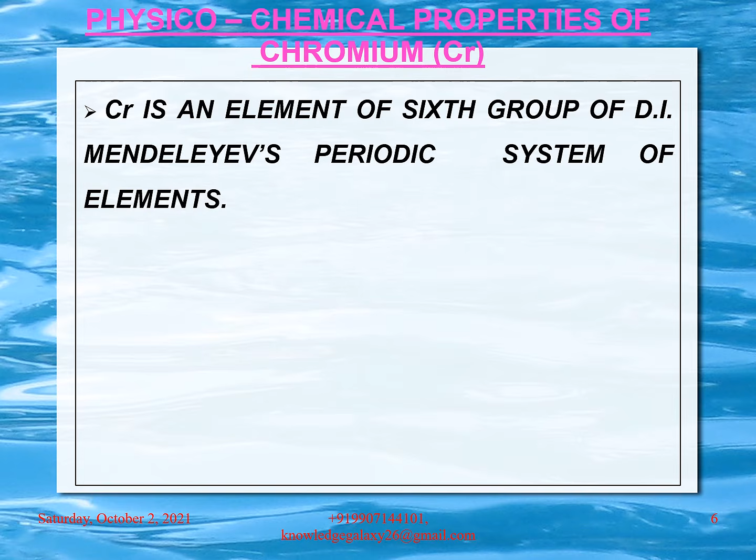First, we will start with the physico-chemical properties of chromium, that is chrome, Cr. Chromium is an element of the sixth group of D.I. Mendeleev's periodic system of elements. Mean chromium content in the Earth's crust comes to around 0.02%. As an element, chromium was discovered in 1797 simultaneously by Vauquelin and Klaproth.

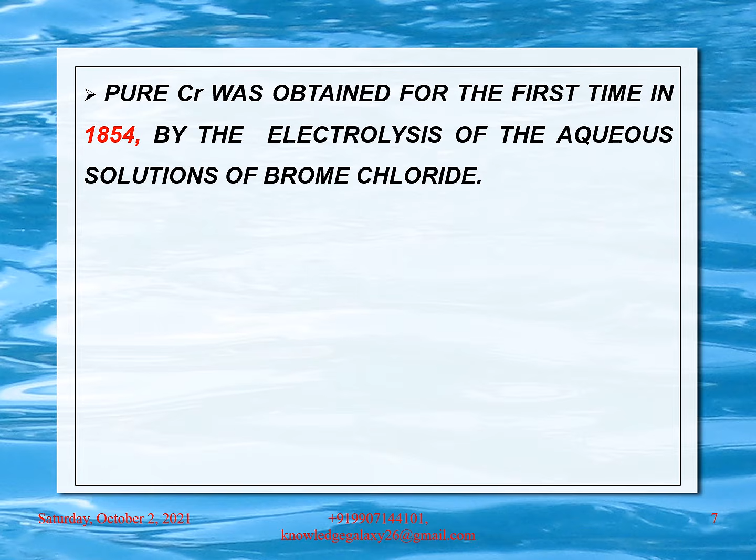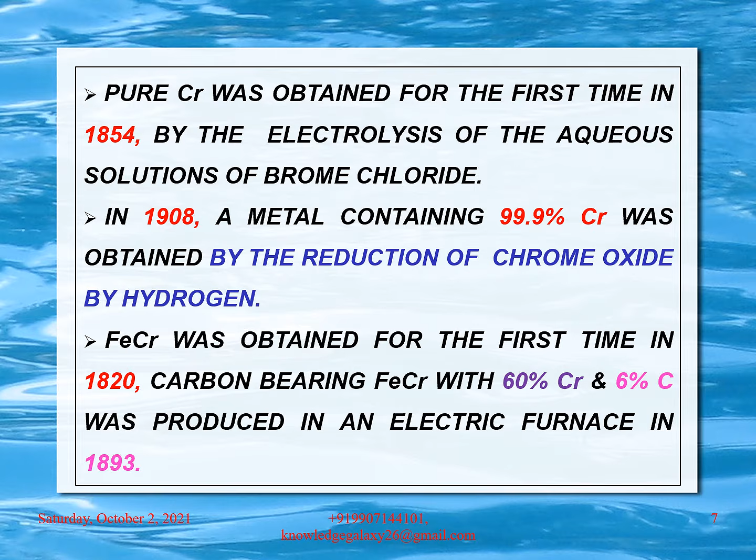Pure chromium was obtained for the first time in 1854 by the electrolysis of aqueous solutions of chrome chloride. In 1908, a metal containing 99.9% chromium was obtained by the reduction of chrome oxide by hydrogen. Ferrochrome was obtained for the first time in 1820. Carbon-bearing ferrochrome with 60% chromium and 6% carbon was produced in an electric furnace in 1893. Low-carbon ferrochrome and metallic chromium were initially obtained by the aluminothermic method.

Pure chromium is a grey lustrous metal. Chromium possesses the following physicochemical properties. First, its atomic weight is 52.01. Specific gravity at 20 degrees Celsius is 7.19 grams per cubic centimeter. Valency of chromium is 2, 3 and 6. Melting point is 1930 degrees Celsius. Its boiling point is 2470 degrees Celsius. Specific heat capacity at 25 degrees Celsius is 0.12 calories per degree Celsius.

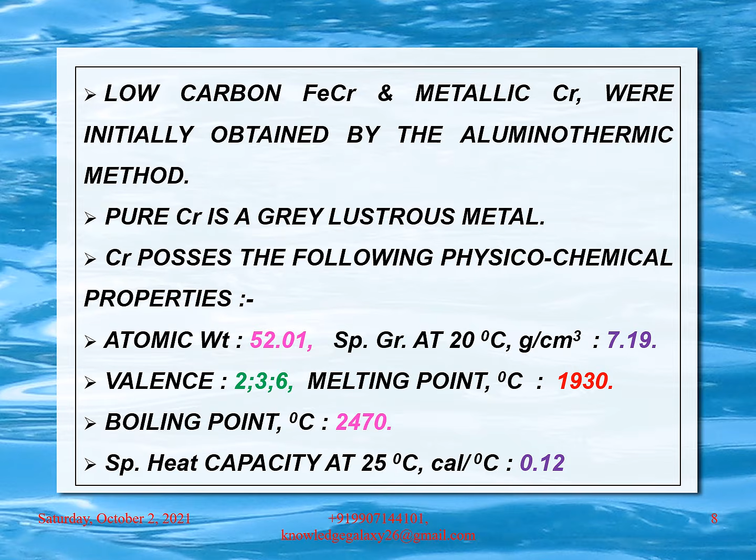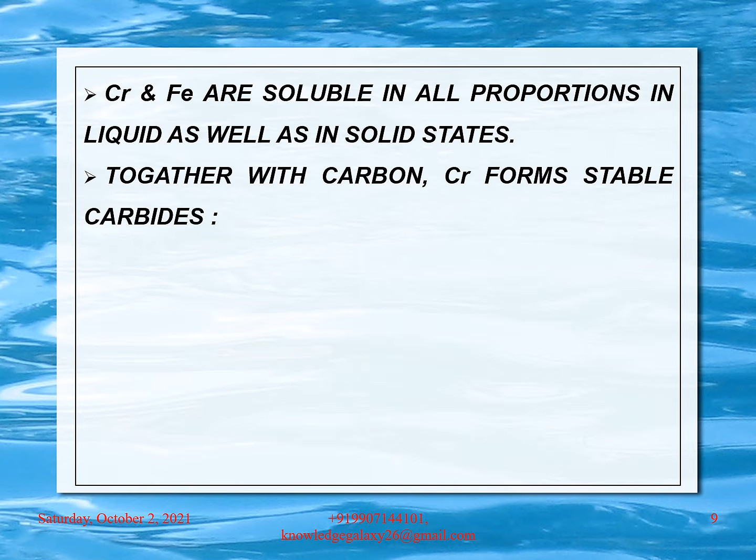Chromium and iron are soluble in all proportions in liquid as well as in solid states. Together with carbon, chromium forms stable carbides such as Cr4C with a melting point of 1520 degrees Celsius and 5.46% carbon. Second, Cr7C3 with a melting point of 1780 degrees Celsius and 9.01% carbon. And third, Cr3C2 with a melting point of 1895 degrees Celsius and 13.34% carbon. My dear friends, as is evident from this, with increase of carbon content, the melting point of chromium carbides increases.

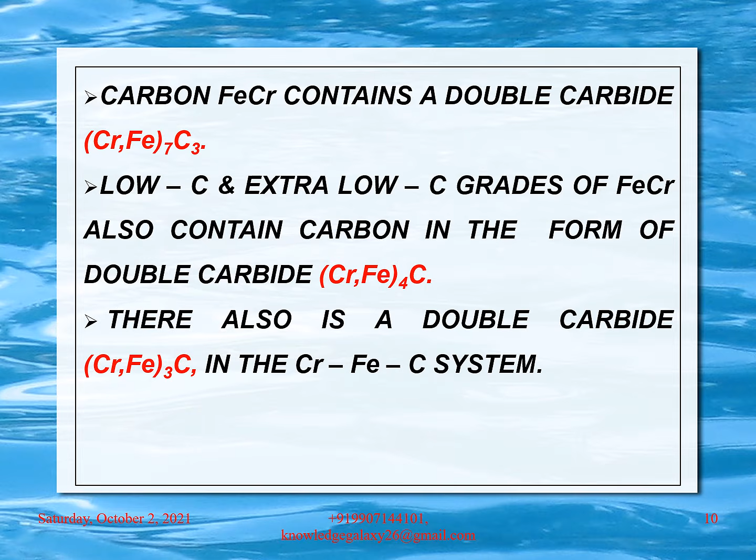Carbon ferrochrome contains a double carbide (Cr,Fe)7C3. Low carbon and extra low carbon grades of ferrochrome also contain carbon in the form of double carbide CrFe4C. There also is a double carbide CrFe3C in the chromium iron carbon system.

With silicon, chromium forms silicides of chromium: Cr3Si with a melting point of 1710 degrees Celsius, Cr3Si2 and CrSi2 with a melting point of 1550 degrees Celsius, and the most stable silicide CrSi with a melting point of 1545 degrees Celsius.

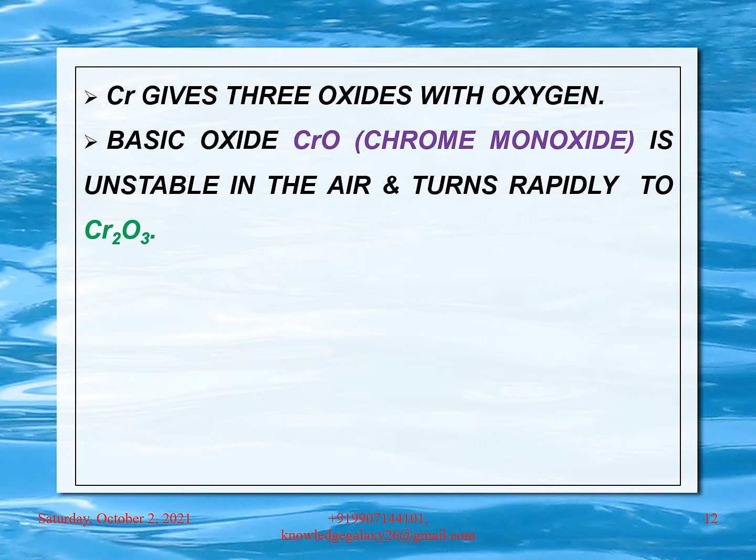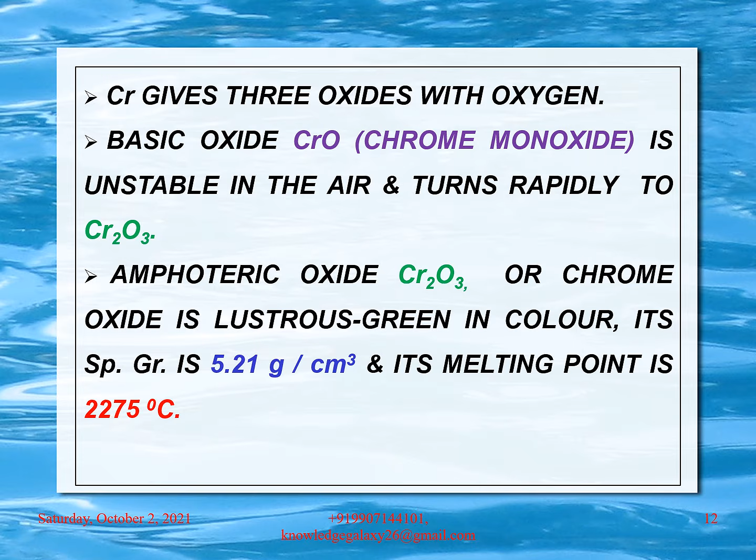Chromium gives 3 oxides with oxygen. Basic oxide CrO, that is chrome monoxide, is unstable in the air and turns rapidly to Cr2O3. Amphoteric oxide Cr2O3 or chrome oxide is lustrous green in color. Its specific gravity is 5.21 gram per cubic centimeter and its melting point is 2275 degrees Celsius.

Acid oxide CrO3, that is chromic anhydride, is crimson in color, has a specific gravity of 2.7 gram per cubic centimeter and a melting point of 196 degrees Celsius. Chromic anhydride decomposes entirely at 240 degrees Celsius with the formation of chrome oxide Cr2O3.

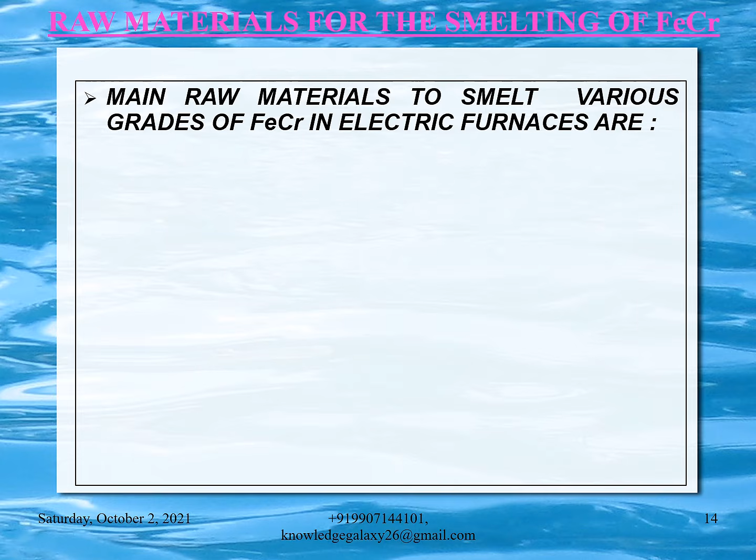Now let us discuss the raw materials required for the smelting of ferrochrome. Main raw materials to smelt various grades of ferrochrome in electric furnaces are: first, chrome ores, that is concentrates, briquettes, lumps and chips. Second, reducers: met coke, fine coke and ferrochrome silicon. Fluxes: quartzite and lime.

Chrome ores whose main chromium bearing components are the chromium spinels (Mg,Fe)(Cr,Al,Fe)2O4 containing from 48 to 62% of Cr2O3, the rest being gangue formed by Al2O3, FeO, MgO etc., are used industrially.

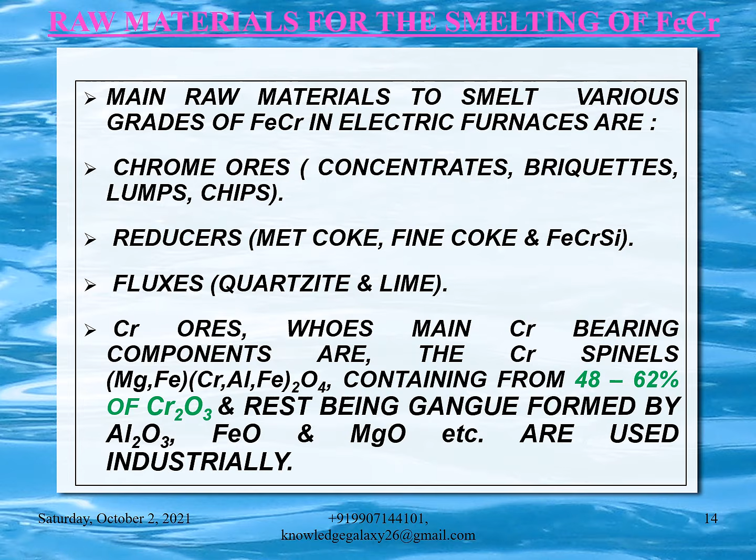The presence of gangue affects the composition of chrome ores. It changes the chromium oxide content in the mineral as well as the Cr2O3 to FeO ratio, which is the main factor of chrome ore quality. I repeat, the Cr2O3 to FeO ratio is the main factor of chrome ore quality. Do remember this. Since FeO is always more readily reduced than Cr2O3, iron is wholly reverted to the alloy when chrome is reduced.

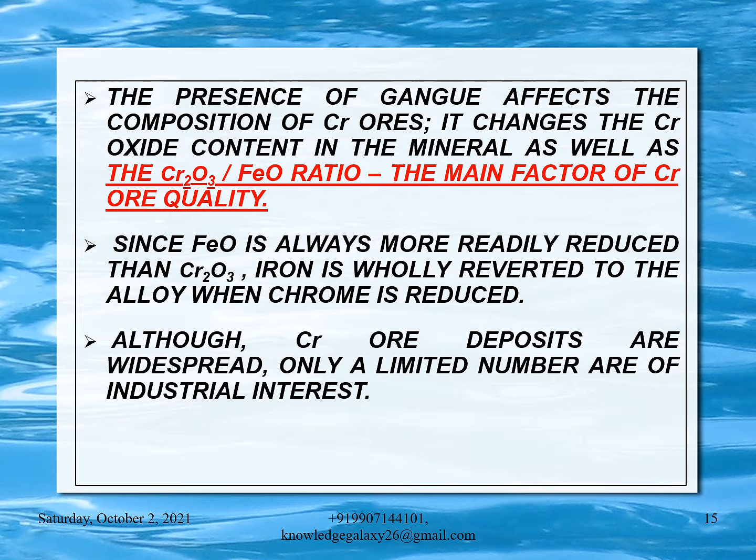Although chromium ore deposits are widespread, only a limited number are of industrial interest. Ores used for the production of refined ferrochrome by the silicothermic method should have the minimum possible SiO2 content, for otherwise additional quantities of fluxes have to be provided, and that entails additional losses of chromium and electrical energy.

The FeO content should be at the minimum too, since a high FeO content leads to unwarranted consumption of the high cost reducer ferrochrome silicon and damages the furnace lining. According to ferrous metallurgy, chromium ore specifications intended for the manufacture of ferroalloys must meet the requirements listed in table 1 below.

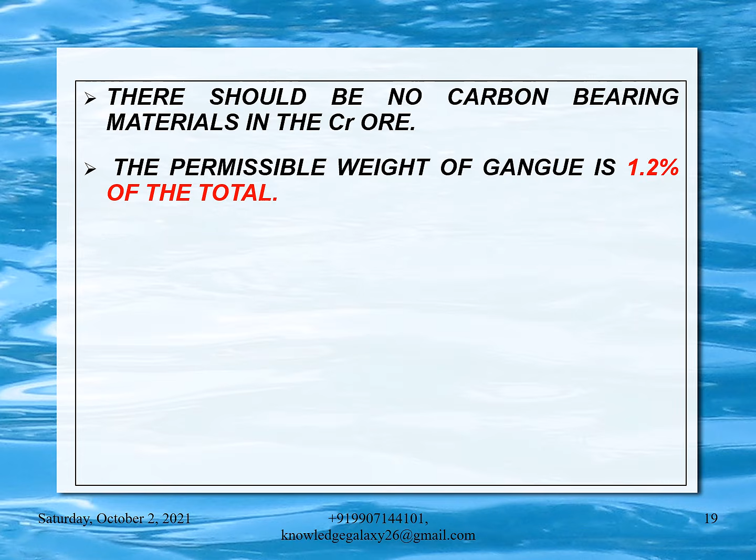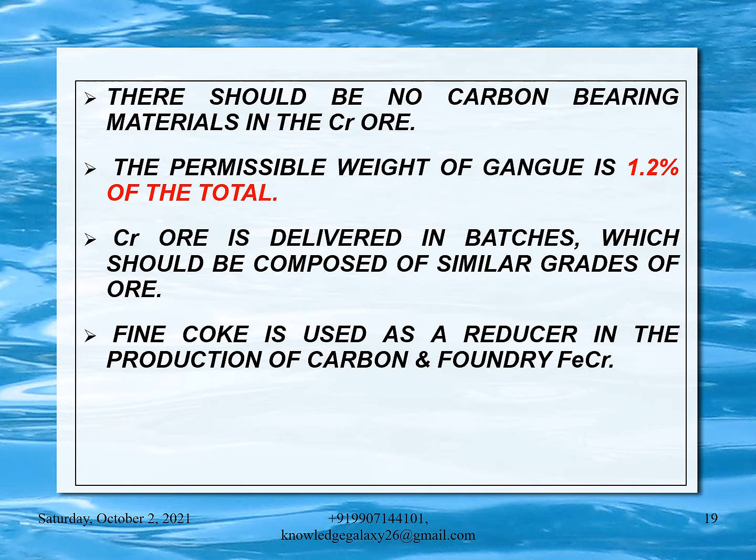Fine coke is used as a reducer in the production of carbon and foundry ferrochrome. I repeat it once again: fine coke is used as a reducer in the production of carbon and foundry ferrochrome. Ferrochrome silicon is used as a reducer when smelting other grades of ferrochrome. There is a difference in reducers used for different grades of ferrochrome, so please do remember.

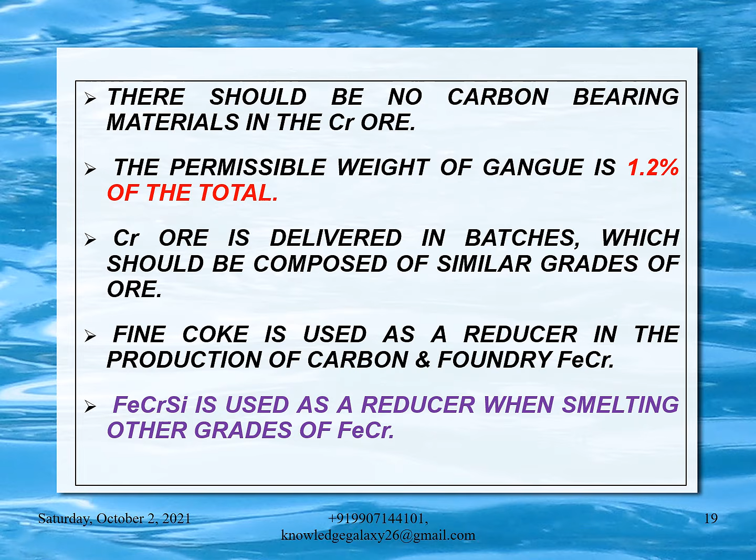The fluxing material used in the manufacture of refined ferrochrome is lime. It should be well burnt and contain at least 90% CaO and below 0.025% phosphorus. The lumps of lime should not exceed 80 mm in size. Hydrated lime is not to be used. Quartzites are used as fluxing material when smelting carbon grades of ferrochrome.

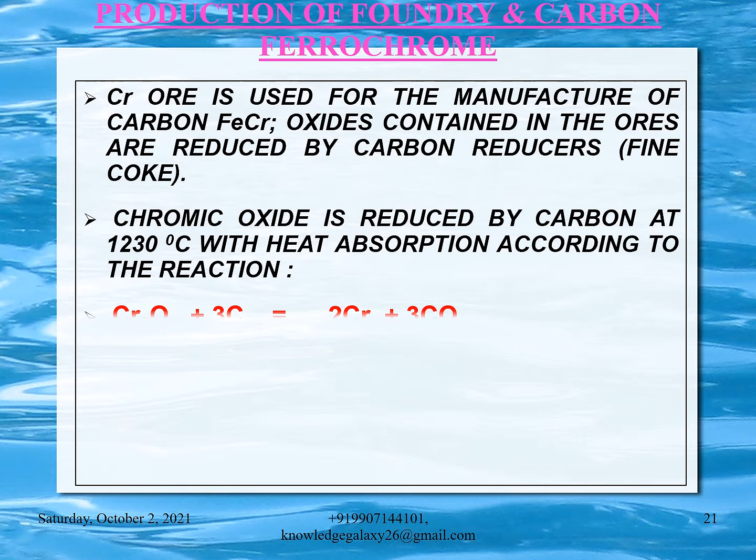Now let us discuss the production of foundry and carbon grades of ferrochrome. Chromium ore is used for the manufacture of carbon ferrochrome. Oxides contained in the ores are reduced by carbon reducers, that is fine coke. Chromic oxide is reduced by carbon at 1230 degrees Celsius with heat absorption according to the reaction Cr2O3 + 3C = 2Cr + 3CO.

Stable carbides are formed in the reduction of Cr2O3 by carbon at 1100 degrees Celsius according to the reaction Cr2O3 + 27/7 C = 2/7 Cr7C3 + 3CO. The reduction of FeO proceeds according to the reaction FeO + C = Fe + CO. Iron reduced from ore promotes the reduction of chromium, since chrome carbides which appear in the later processes dissolve in iron with the formation of double carbides (Cr,Fe)7C3.

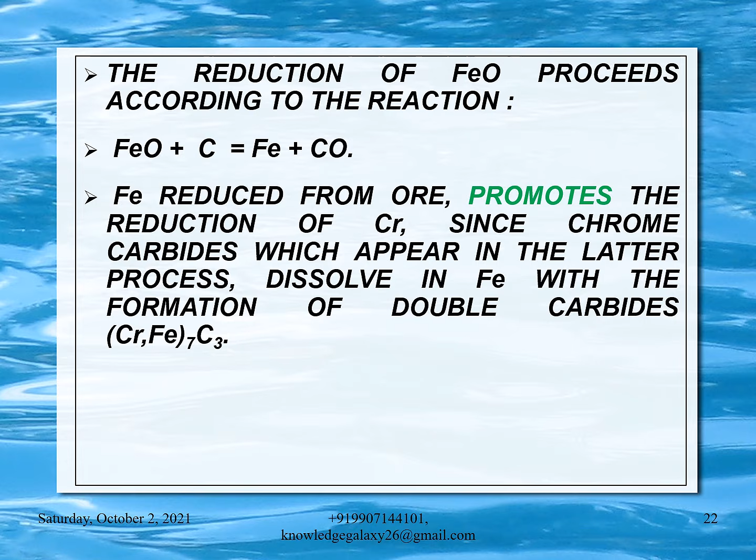The melting point of commercial carbon ferrochrome is about 1500 degrees Celsius. Although the temperature of the reduction processes of chromium and iron oxides are relatively low, the smelting of carbon ferrochrome is practically effected at 1650 to 1750 degrees Celsius because this ensures sufficient slag and alloy fluidity and satisfactory slag-alloy separation.

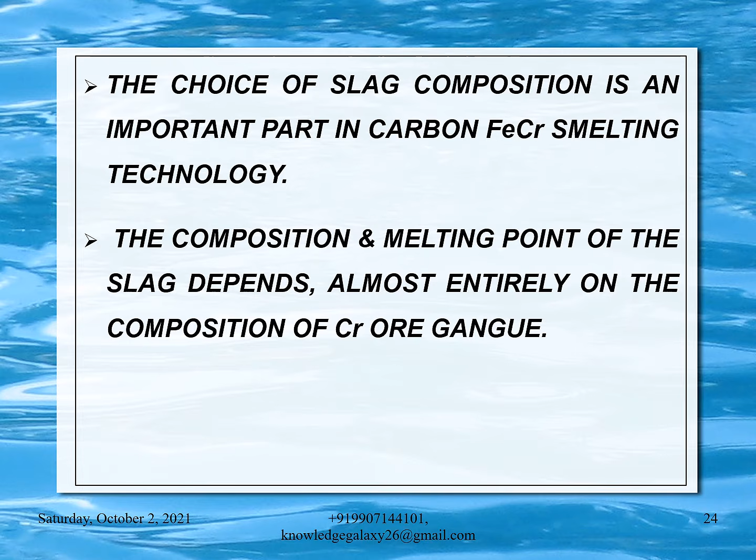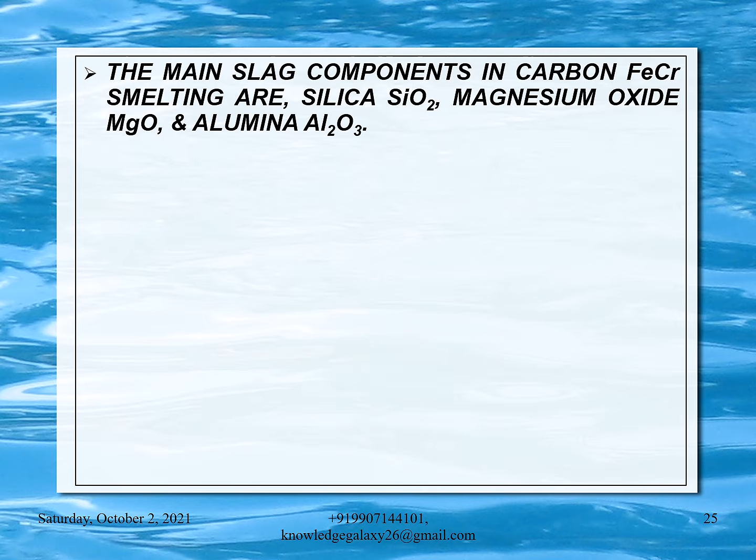The choice of slag composition is an important part in carbon ferrochrome smelting technology. The composition and melting point of the slag depends almost entirely on the composition of chrome ore gangue. The main slag components in carbon ferrochrome smelting are silica SiO2, magnesium oxide MgO and alumina Al2O3.

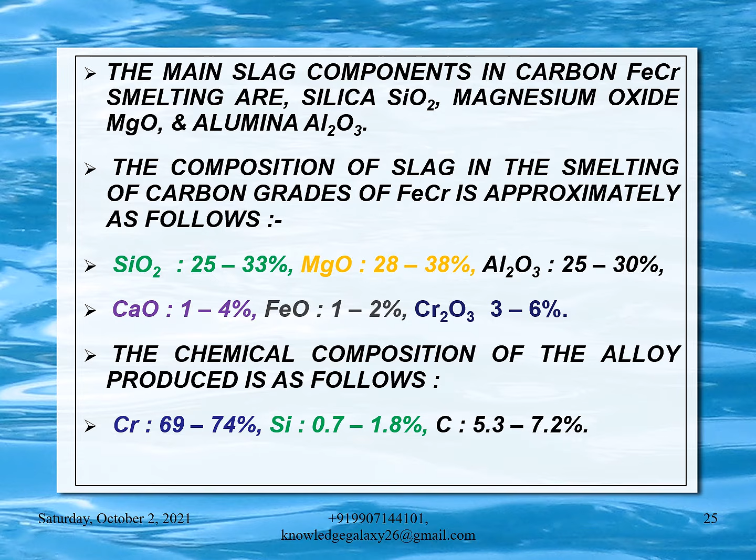The composition of slag in the smelting of carbon grades of ferrochrome is approximately as follows: SiO2 25 to 33%, MgO 28 to 38%, Al2O3 25 to 30%, CaO 1 to 4%, FeO 1 to 2%, Cr2O3 3 to 6%. The chemical composition of the alloy produced is as follows: chromium 69 to 74%, silicon 0.7 to 1.8%, carbon 5.3 to 7.2%.

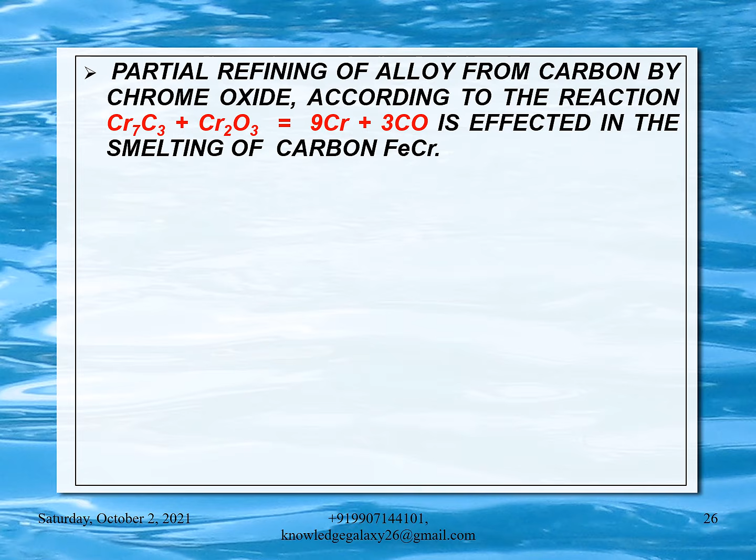Partial refining of alloy from carbon by chrome oxide according to the reaction Cr7C3 + Cr2O3 = 9Cr + 3CO is effected in the smelting of carbon ferrochrome. This process is possible only at high temperatures and with elevated concentrations of chrome oxide in the reaction zone. Consequently, the smelting process is effected in the presence of hard-to-fuse slags which are formed when hard-to-reduce lumps of rich ores are used.

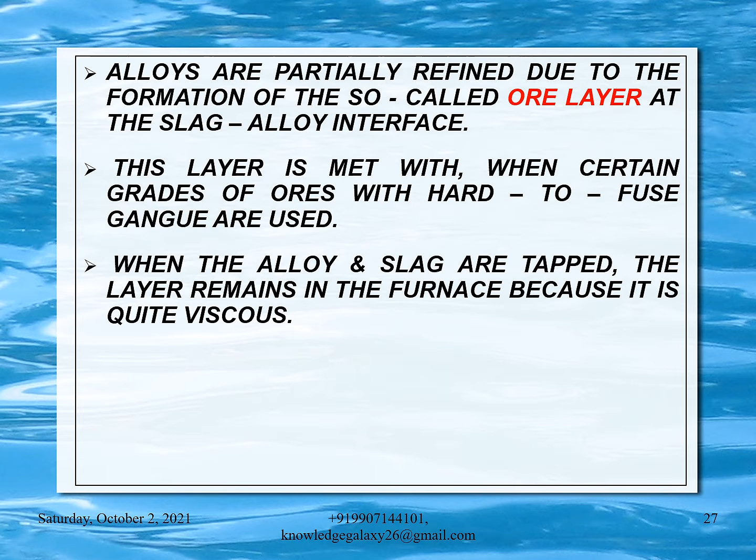Alloys are partially refined due to the formation of the so-called ore layer at the slag-alloy interface. This layer is met with when certain grades of ores with hard-to-fuse gangue are used. When the alloy and slag are tapped, the layer remains in the furnace because it is quite viscous. Drops of alloy trickle down through the layer and are partly refined from carbon.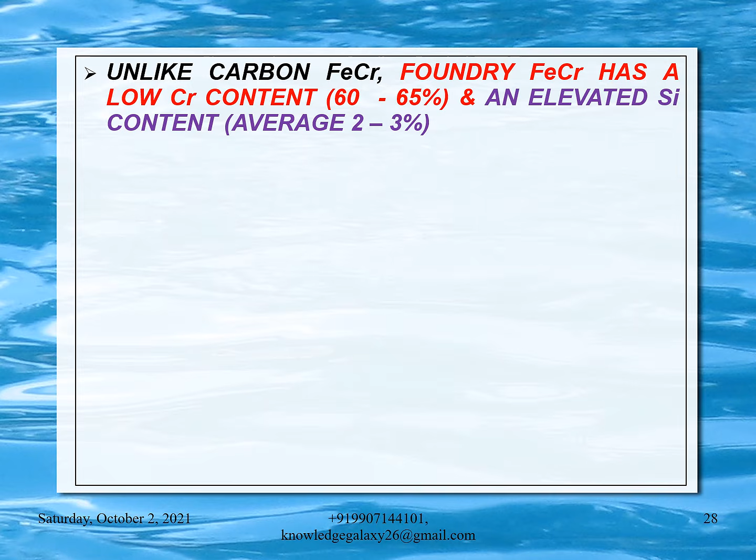Unlike carbon ferrochrome, foundry ferrochrome has a low chromium content, that is 60 to 65%, and an elevated silicon content, which is on average 2 to 3%. Its carbon content is not specified, and this may cause an excess of silica and reducer in the mixture. Such an alloy assay permits the use of low quality ores, chromium-bearing slags with 25 to 30% Cr2O3, and tailings of ferrochrome and ferrosilicon smelting. The high temperatures of the process ensure the reduction of silicon in addition to that of chromium and iron.

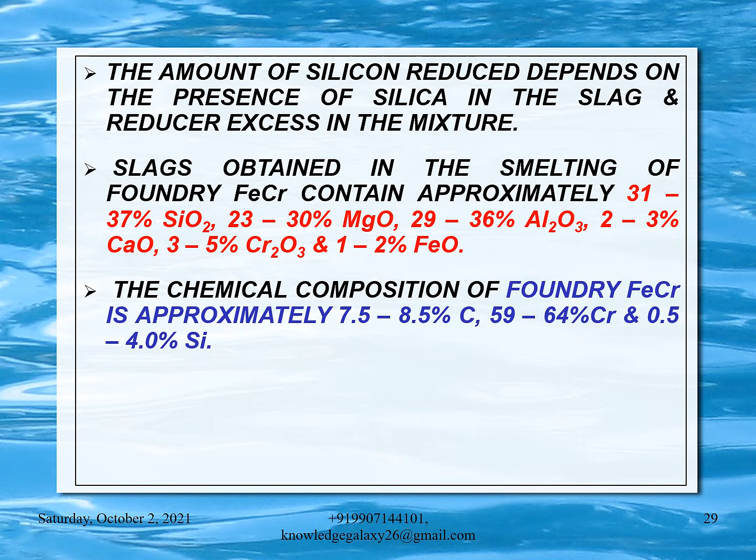The amount of silicon reduced depends on the presence of silica in the slag and reducer excess in the mixture. Slags obtained in the smelting of foundry ferrochrome contain approximately 31 to 37% SiO2, 23 to 30% MgO, 29 to 36% Al2O3, 2 to 3% CaO, 3 to 5% Cr2O3, and 1 to 2% FeO. The chemical composition of foundry ferrochrome is approximately 7.5 to 8.5% carbon, 59 to 64% chromium, and 0.5 to 4% silicon. Quartzites are added to the mixture to provide the necessary amount of silica in smelting both carbon and foundry ferrochrome.

So, my dear friends, let us now discuss the uses of ferrochrome. Ferrochrome is an alloy of chrome and iron with additions of carbon, silicon, and several other elements. As an alloying element, chrome is a component of numerous grades of steels and special alloys. Steels alloyed with chrome acquire valuable physical properties. It increases steel hardness, strength, yield point, and elasticity.

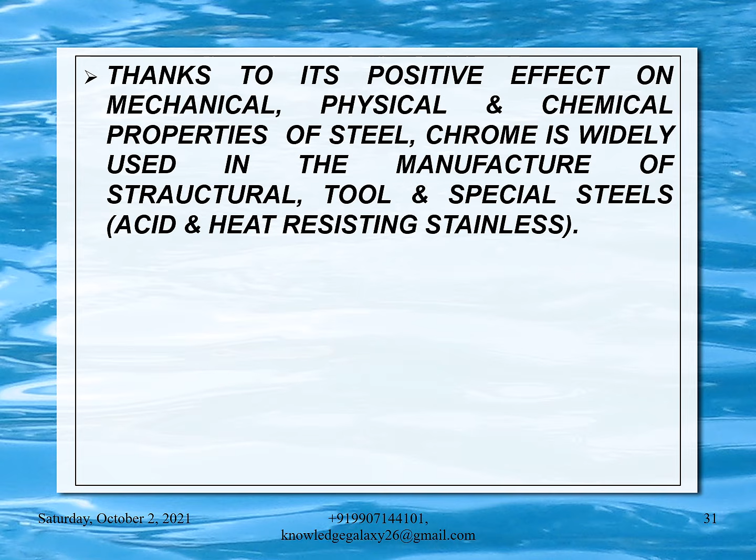Thanks to its positive effect on mechanical, physical, and chemical properties of steel, chrome is widely used in the manufacture of structural, tool, and special grade steels, and acid and heat resisting stainless steels. Low carbon steel with more than 12% chromium and approximately 8% nickel is called stainless steel. When steel contains chrome and silicon, it acquires heat resisting qualities. Chromium is used most as an alloying element in combination with nickel, 17.5 to 19% chromium and 8 to 11% nickel. Such a combination of elements gives steel acid resisting characteristics.

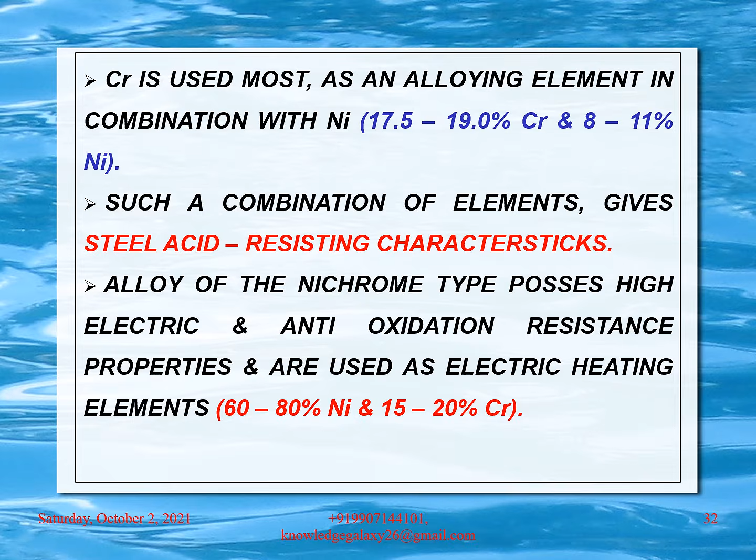Alloys of the nichrome type possess high electric and anti-oxidation resistance properties and are used as electric heating elements; they contain 60 to 80% nickel and 15 to 20% chromium. Heat resisting steels containing 13 to 60% chromium are widely used in the manufacture of gas turbine and jet engine parts. Chromous steels containing approximately 1% of carbon and 1% of chromium are very hard and are widely used in the manufacture of ball and roller bearings.

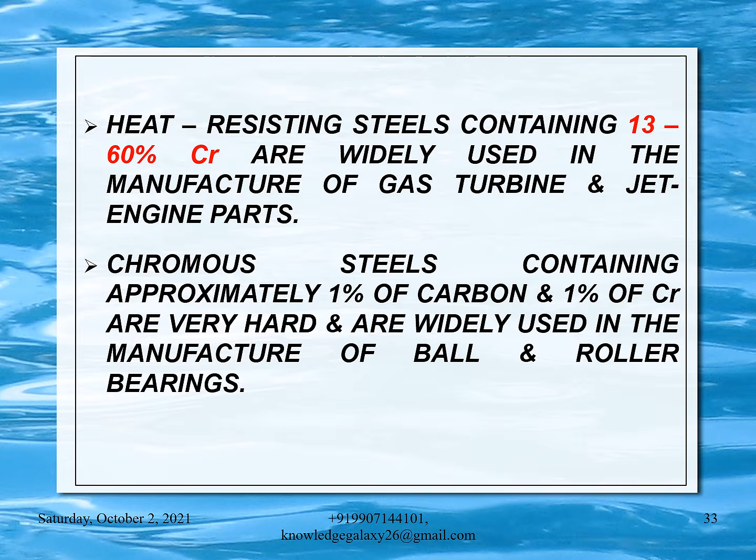Now let us discuss the grades of ferrochrome. Ferrochrome is manufactured in various grades for the alloying of alloys and steels as shown in table 2. Metallic chromium with specifications as shown in table 3 is used for the manufacture of steel with special physical properties and alloys with a low iron content. In some cases, special grades of extra low carbon and nitrided ferrochrome are used, and their compositions are shown in table 4.

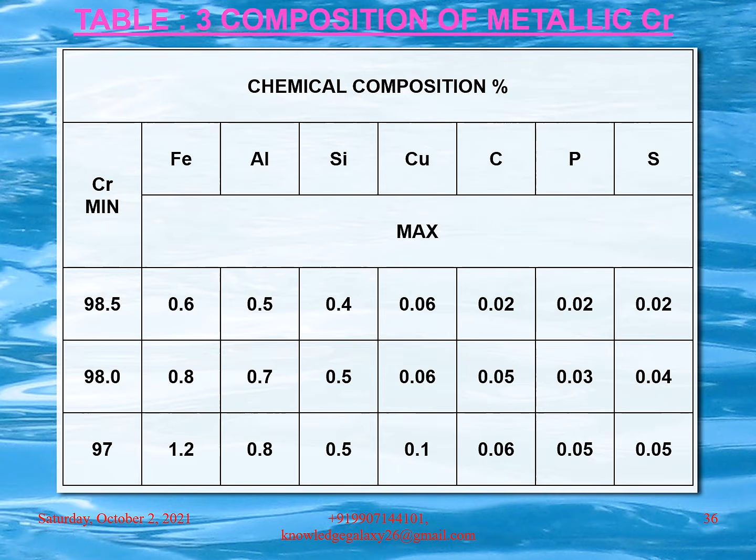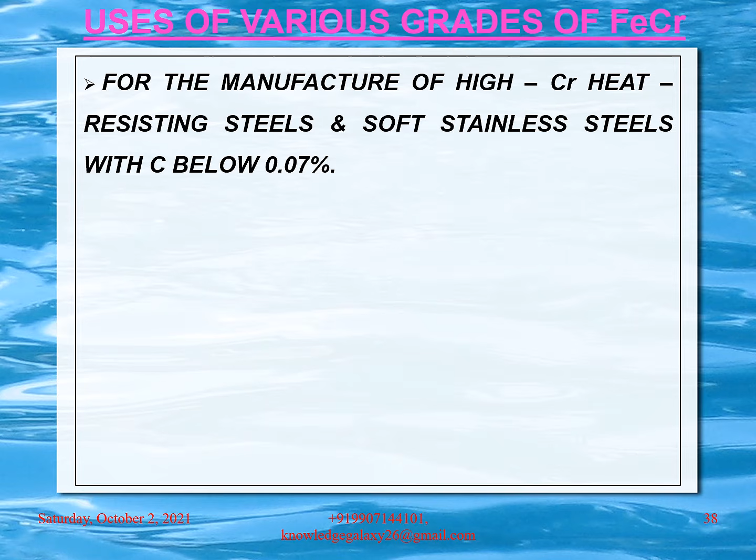Now, uses of various grades of ferrochrome. For the manufacture of high chromium heat resisting steels and soft stainless steels with carbon below 0.07%. For the manufacture of high chromium heat resisting steels with up to 0.20% carbon, as well as stainless acid resisting steels.

For the manufacture of acid resisting stainless steels with carbon content up to 0.3% and several grades of low carbon chromium tungsten steels. These are the uses of various grades of ferrochrome. For the manufacture of chromous stainless steels. For the manufacture of low carbon structural steels.

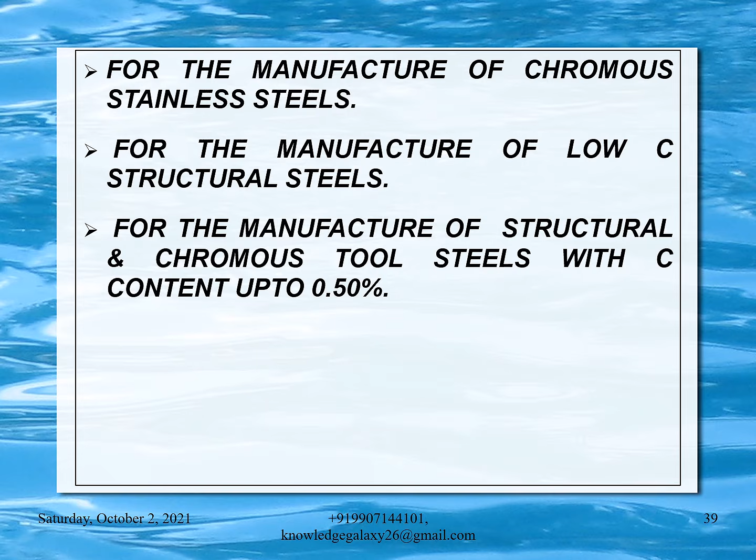For the manufacture of structural and chromous tool steels with carbon content up to 0.50%. For the manufacture of all grades of chromous steels with a high carbon content, tool steels.

Now, the most important part of the presentation is burden calculations, or material balance, of ferrochrome. For that, we require initial data, which can be taken as: reduction of Cr2O3 in the ore is approximately 90%. Reduction of iron oxides in the ore is approximately 95%. Carbon content in the alloy is 7%.

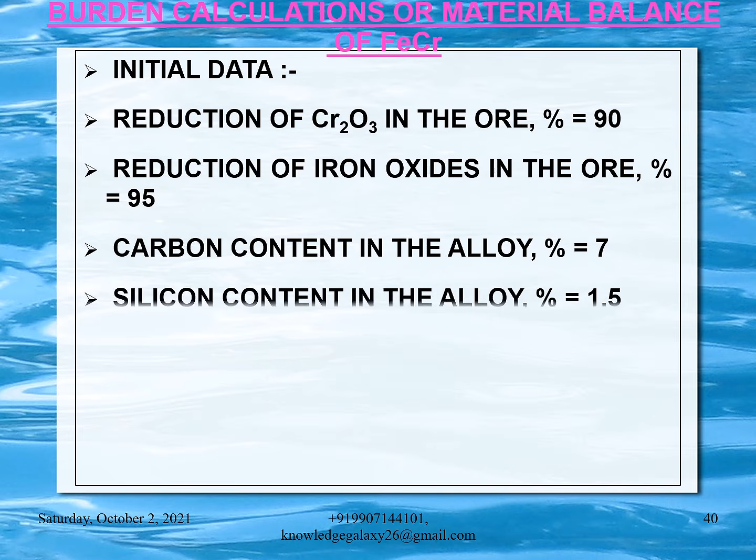Silicon content in the alloy is 1.5%. The amount of fixed carbon in the mixture exceeds the stoichiometric amount by 25%. The SiO2 content in the slag, assuming that the slag is composed of 3 components only, comes to 30%.

The composition of ore is 54% Cr2O3, 15.6% FeO, 13.6% MgO, 10% Al2O3, 4.5% SiO2. The reducer, fine coke, contains minimum 87% of fixed carbon. Quartzite containing 97% minimum SiO2 serves as flux.

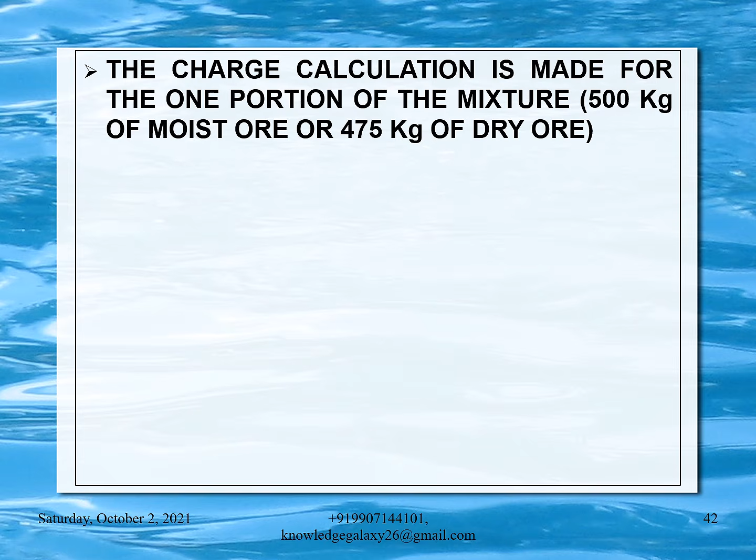The charge calculation is made for one portion of the mixture, that is 500 kg of moist ore or 475 kg of dry ore. Amount of chrome reduced by the reaction Cr2O3 plus 3C is equal to 2Cr plus 3CO. My dear friends, here you have to always keep in mind the atomic weights of different elements, so that you can balance the equations and further calculate the requirements.

So here comes 475 into 0.54 into 0.90 into 104 divided by 152, which comes to 158 kg. Here 104 is the Cr2 atomic weight and 152 is the Cr2O3 molecular weight. Amount of iron reduced by the reaction FeO plus C is equal to Fe plus CO.

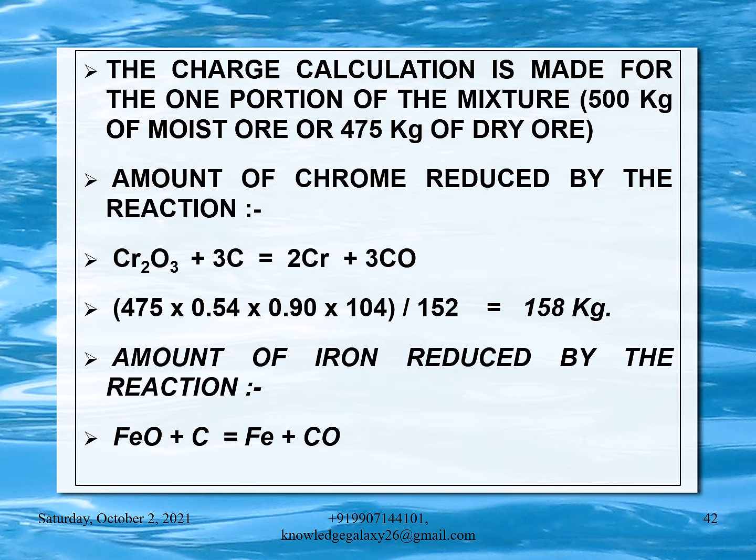It comes to 475 into 0.156 into 0.95 into 56 divided by 72 is equal to 54.8 kg. Here 0.156 is the 15.6% of FeO content in the ore, 0.95 is the reduction of FeO from the ore, 56 is the atomic weight of iron, and 72 is the molecular weight of FeO.

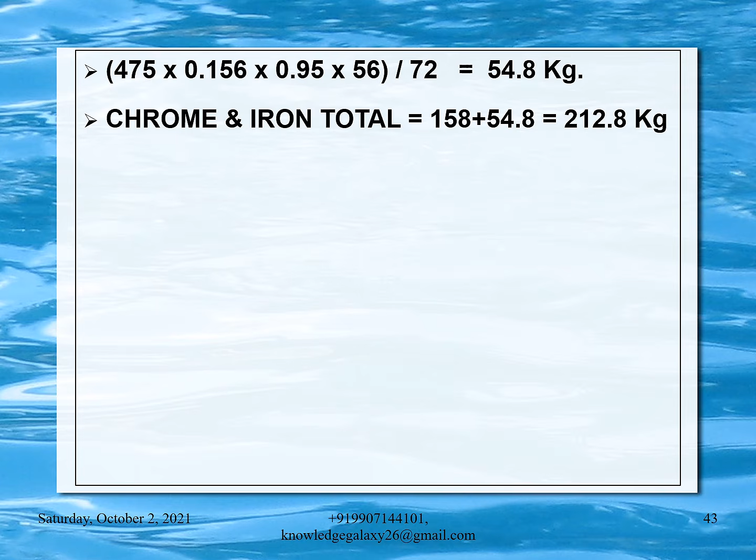Chrome and iron total is equal to 158 plus 54.8, which comes to 212.8 kg. The chrome and iron contained in the alloy, the sum of carbon and silicon subtracted, averages 100 minus (7 plus 1.5), equal to 91.5%. The amount of alloy obtained is equal to 212.8 divided by 0.915, equal to 232.6 kg.

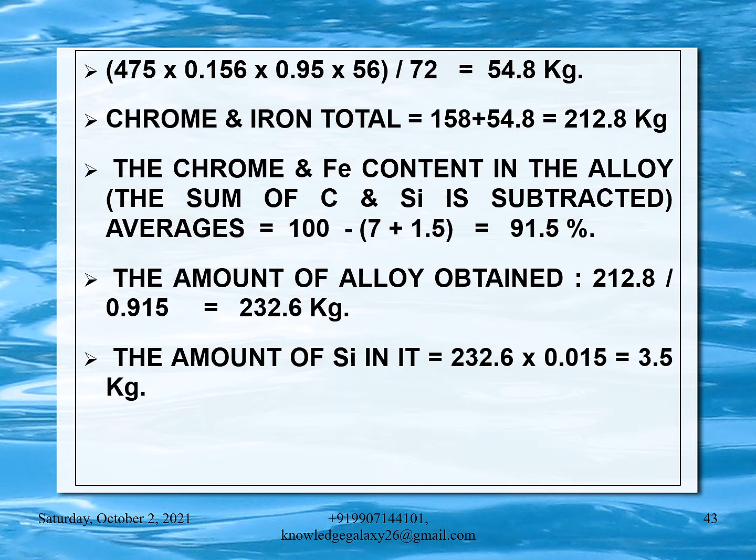The amount of silicon in it is 232.6 into 0.015 is equal to 3.5 kg. Here 0.015 is 1.5% silicon in the alloy. The amount of carbon necessary, let us calculate. For the reduction of Cr2O3 according to the reaction Cr2O3 plus 3C is equal to 2Cr plus 3CO, it comes to 158 into 36 divided by 104 is equal to 54.7 kg. 158 is the chromium content of the alloy.

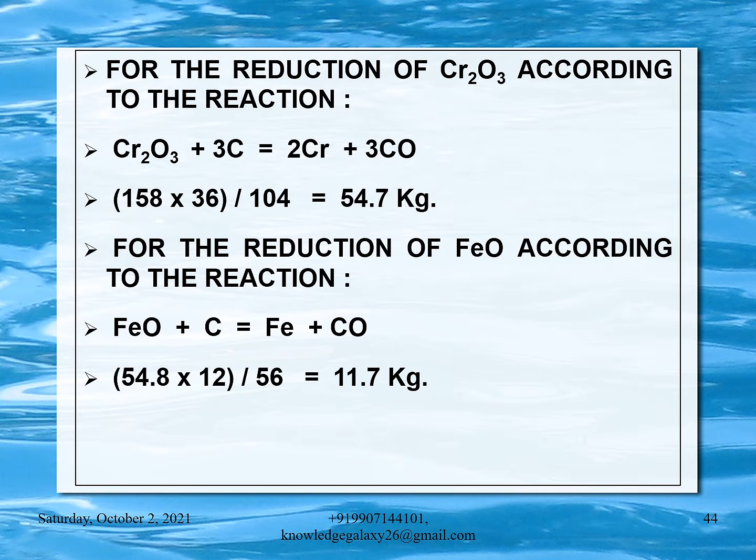For the reduction of FeO according to the reaction FeO plus C is equal to Fe plus CO, it comes to 54.8 into 12 divided by 56 is equal to 11.7 kg. For the reduction of SiO2 according to the reaction SiO2 plus 2C is equal to Si plus 2CO, it comes to 3.5 into 24 divided by 28 is equal to 3.0 kg.

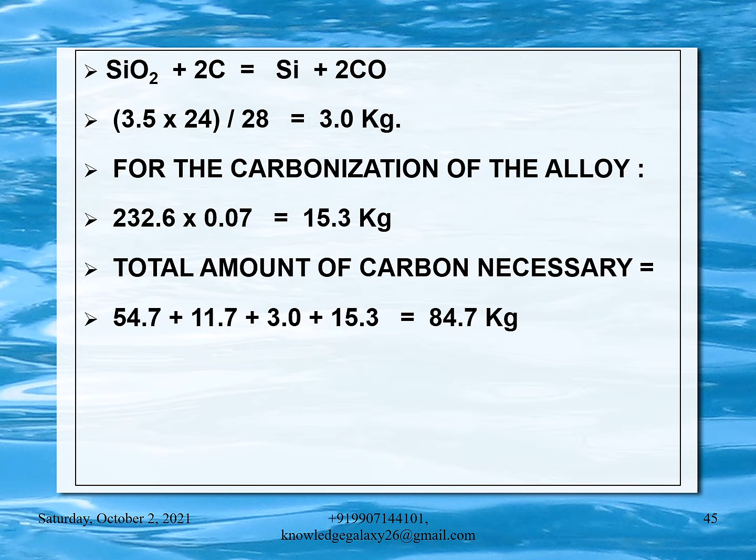For the carbonization of the alloy, we require 232.6 into 0.07 is equal to 15.3 kg of carbon. 0.07 is 7% carbon in the alloy. Total amount of carbon necessary is equal to 54.7 plus 11.7 plus 3.0 plus 15.3 is equal to 84.7 kg.

Amount of fine coke necessary including 25% excess is equal to 84.7 into 1.25 divided by 0.87 is equal to 121.7 kg. Here 0.87 is 87% of fixed carbon in the fine coke.

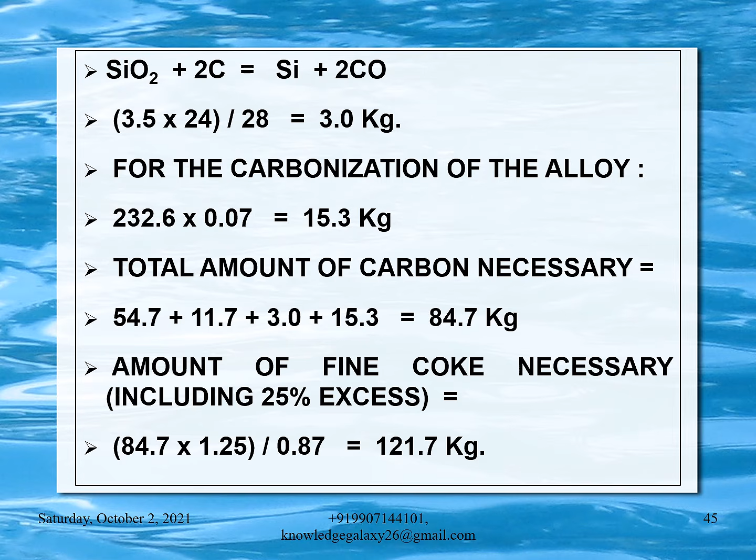My dear friends, you have to always keep in mind the various percentage contents of the particular element, from where it is coming, its atomic weight, and its recovery in the metal and slag separately. Let us now calculate the necessary amount of quartzite, X being the amount of quartzite introduced with the ore.

Al2O3 which is introduced with the ore is 475 into 0.10 is equal to 47.5 kg. MgO is 475 into 0.136 is equal to 64.6 kg. SiO2 is 475 into 0.045 plus 0.97x minus 3.5 into 60 divided by 28 is equal to 13.9 plus 0.97x.

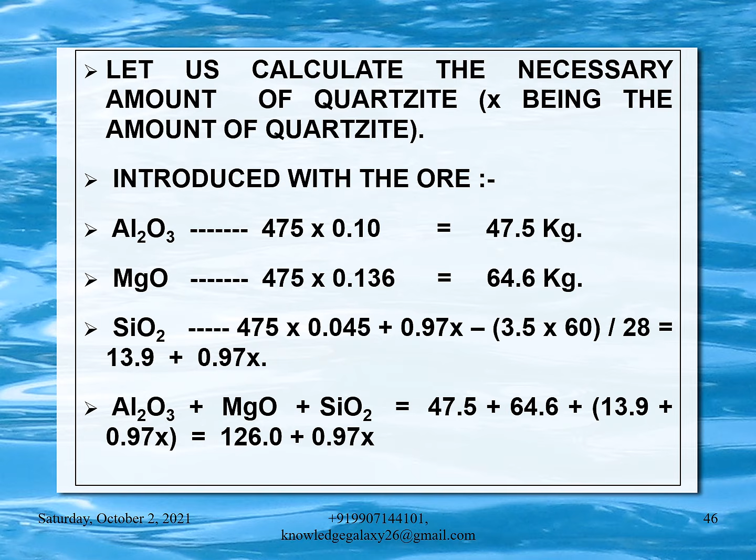So it comes: Al2O3 plus MgO plus SiO2 is equal to 47.5 plus 64.6 plus 13.9 plus 0.97x is equal to 126.0 plus 0.97x. 13.9 plus 0.97x is equal to 0.3 into 126.0 plus 0.97x. Here 0.3 is 30% of SiO2 in the slag. Do remember that. Please don't get confused.

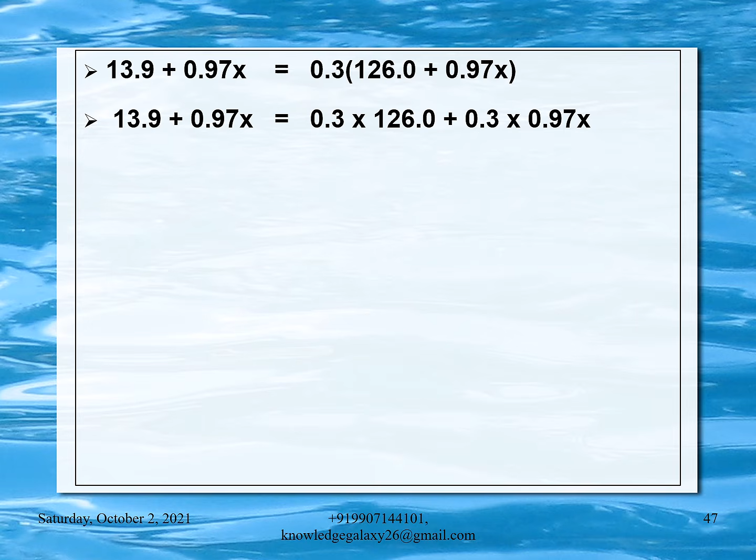Let us now further solve this equation. 13.9 plus 0.97x is equal to 0.3 into 126 plus 0.3 into 0.97x. So further solving this equation gives x is equal to 0.3 into 126 minus 13.9, whole divided by 0.97 minus 0.3 into 0.97, is equal to 23.9 divided by 0.68 is equal to 35 kg. You can further calculate all the data to balance the equation.

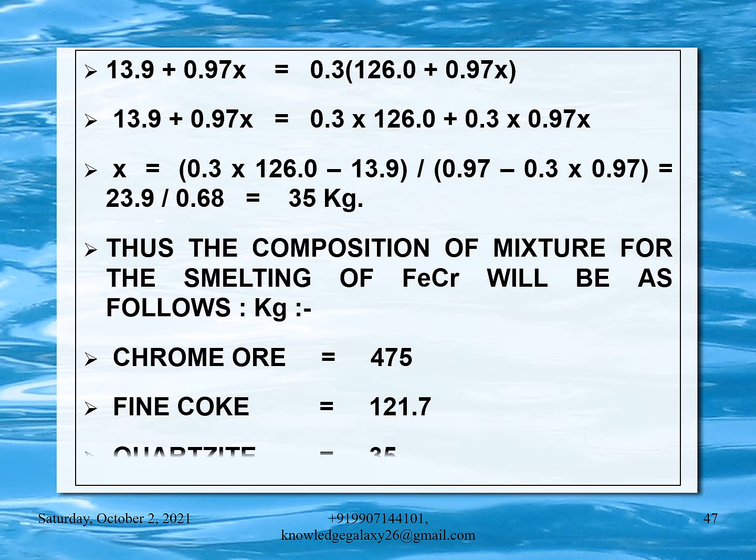Thus, the composition of mixture for the smelting of ferrochrome will be as follows in kgs. All quantities in kg. Chrome ore 475 kg. This is the dry quantity. Fine coke is 121.7 kg. And quartzite is 35 kg.

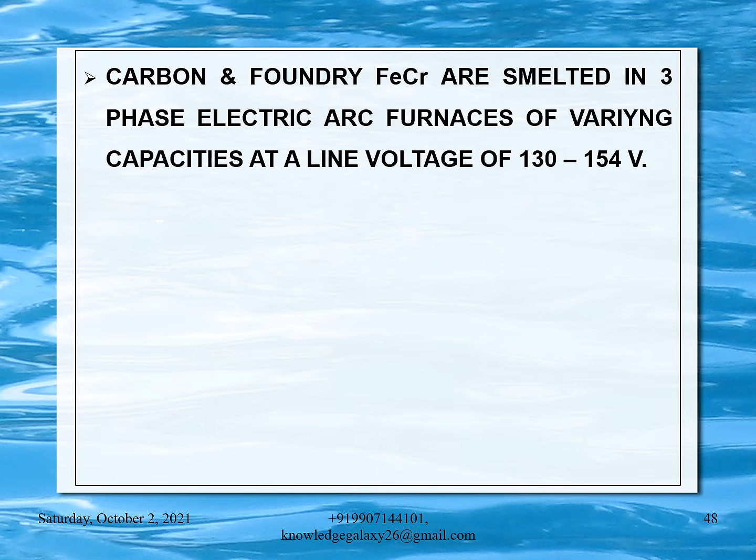Carbon and foundry ferrochrome are smelted in three-phase electric arc furnaces of varying capacities at a line voltage of 130 to 154 volts. The smelting of carbon ferrochrome is a continuous process with closed top. The charged mixture is charged into the furnace mainly onto the electrodes as the preceding portion melts down. The charged mixture is composed of 500 kg of chromium ore, stoichiometric amounts of quartzite and fine coke, and 30 to 40 kg of reverts.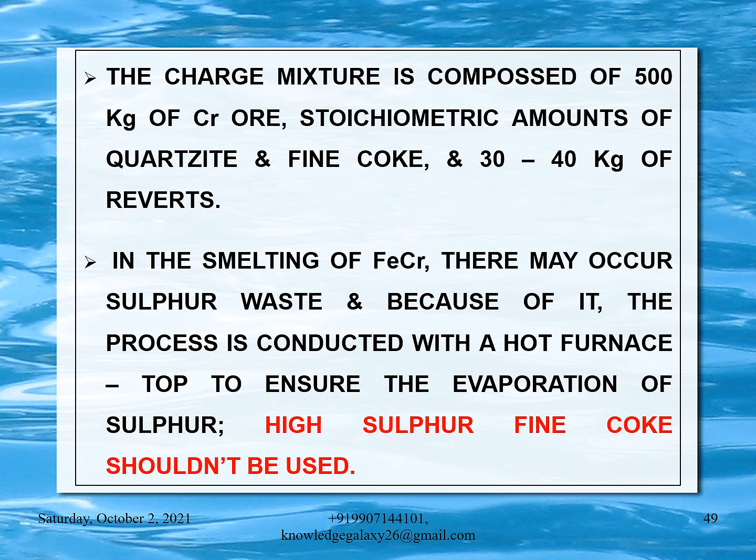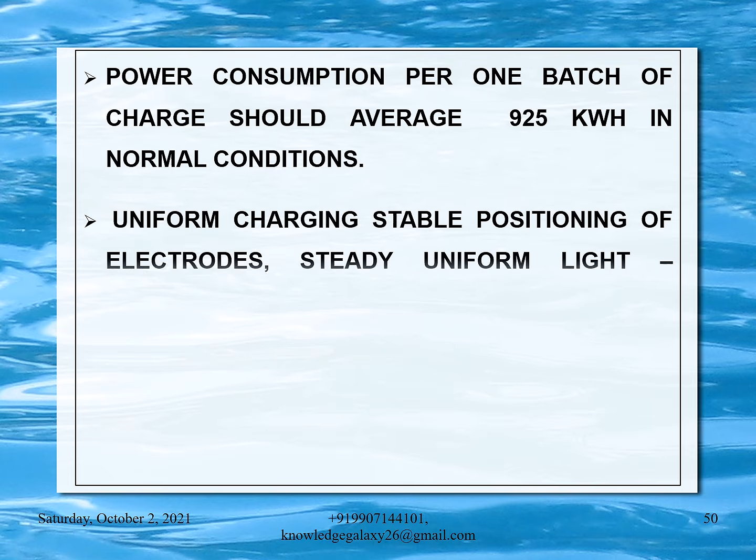In the smelting of ferrochrome, there may occur sulfur waste, and because of it, the process is conducted with a hot furnace top to ensure the evaporation of sulfur. High sulfur fine coke shouldn't be used. Power consumption per one batch of charge should average 925 kWh in normal conditions. Uniform charging, stable positioning of electrodes, steady, uniform, light yellow flame at the top, and easy tapping of alloy and slag and their correct composition are proof of normal operating conditions.

So, my dear friends, let us now discuss some practical problems associated with carbon ferrochrome smelting. These are very special data, very important information. Lack of reducer in the mixture, the amount of quartzite being normal, causes fluctuations of input at the electrodes and high consumption of the electrodes. The carbon content in the alloy decreases, slag becomes viscous and its Cr2O3 content goes up. This is one problem. So its solution is a single charge of fine coke, 200 to 300 kg, and an increased amount of reducer in the mixture remedy the situation. Let us now discuss the next problem.

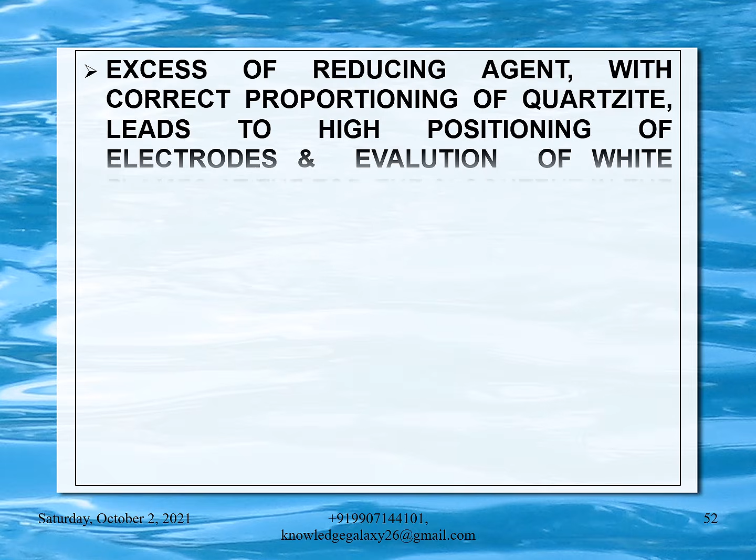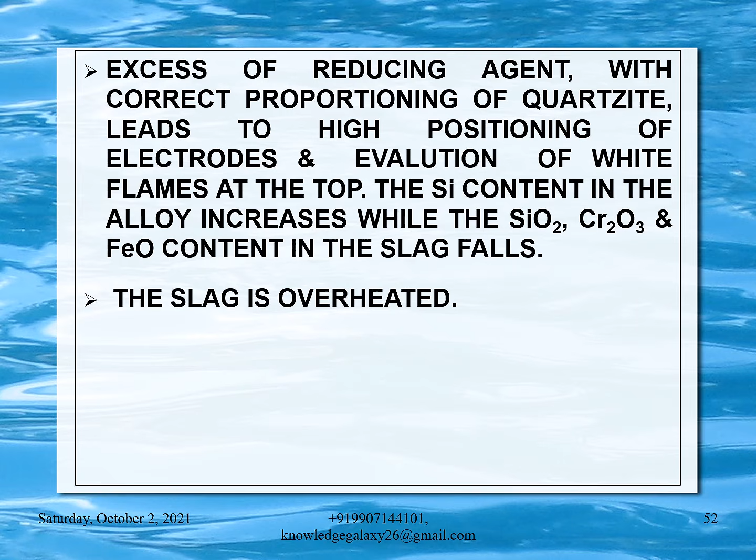Excess of reducing agent with correct proportioning of quartzite leads to high positioning of electrodes and evolution of white flames at the top. The silicon content in the alloy increases while the SiO2, Cr2O3 and FeO content in the slag falls. The slag is overheated. To set the furnace right, the amount of fine coke is reduced or one or two batches of mixture are charged without coke.

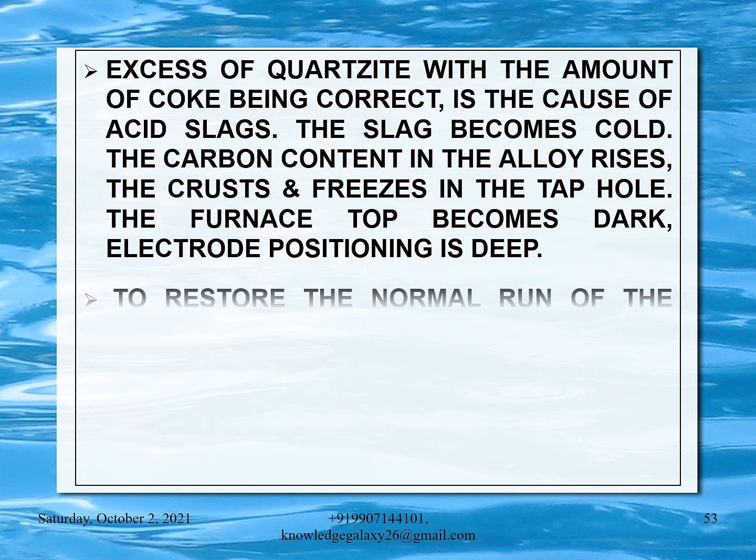The other problem is excess of quartzite with the amount of coke being correct is the cause of acid slags. The slag becomes cold, the carbon content in the alloy rises, crusts and freezes form in the tap hole, the furnace top becomes dark, electrode positioning is deep. To restore the normal run of the furnace, the quantity of the quartzite in the mixture is diminished, though an even more drastic method is to exclude quartzite entirely from a number of mixture batches.

Another problem is lack of quartzite with correct amount of coke, which causes the formation of hard to fuse and viscous slag with large amounts of entangled metal prills. Slag salamanders grow round the electrodes. White smoke evolves at the top. The slag is dense, viscous and is tapped with difficulty. The alloy is overheated. The carbon content in the alloy decreases.

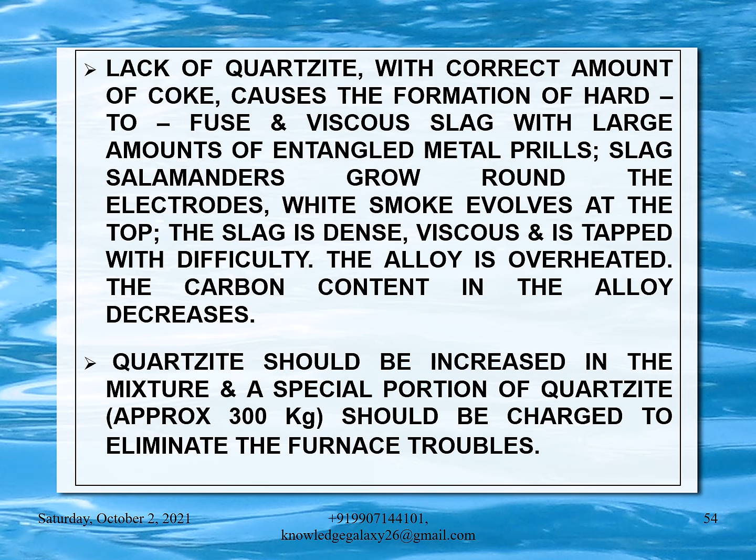To overcome this problem and smoothen the operation, quartzite should be increased in the mixture and a special portion of quartzite, approximately 300 kg, should be charged to eliminate the furnace troubles.

Lack of both the quartzite and fine coke in the furnace leads to the formation of hard to fuse viscous slags which trap considerable amounts of prills of metal and unreduced ore. Slag doesn't flow out of the furnace and erodes furnace walls. The silica content in the slag is low and that of carbon and silicon in the alloy diminishes too. The positioning of the electrodes is high, arcing is audible, blowouts appear round the electrodes. Additional fine coke and quartzite should be charged simultaneously in the furnace to solve the above mentioned problem.

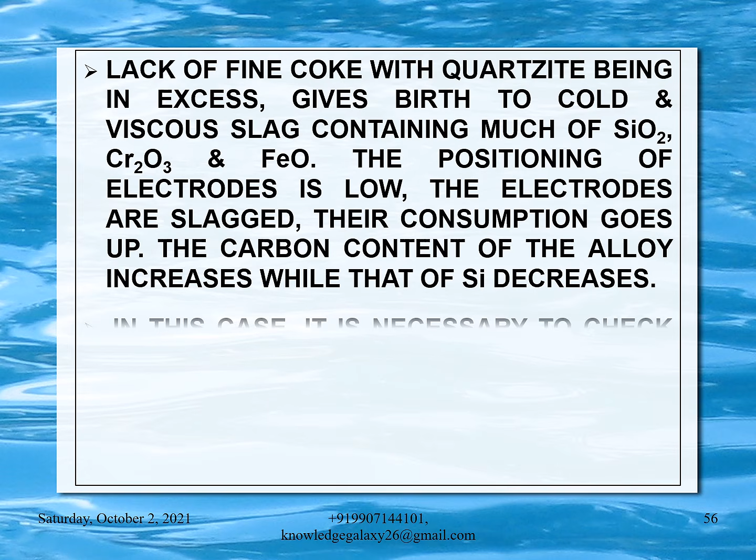Lack of fine coke with quartzite being in excess gives birth to cold and viscous slag containing much of SiO2, Cr2O3 and FeO. The positioning of electrodes is low. The electrodes are slagged. Their consumption goes up. The carbon content of the alloy increases while that of silicon decreases. In this case, it is necessary to check the proportion of the mixture and increase the weight of the reducer in the mixture.

Next problem is excess of coke and quartzite in the mixture, which is followed by an increase in the silicon content of the alloy. Slagged coke comes through the tap hole. The positioning of the electrodes is unstable. Ore without coke and quartzite is to be charged to correct the furnace.

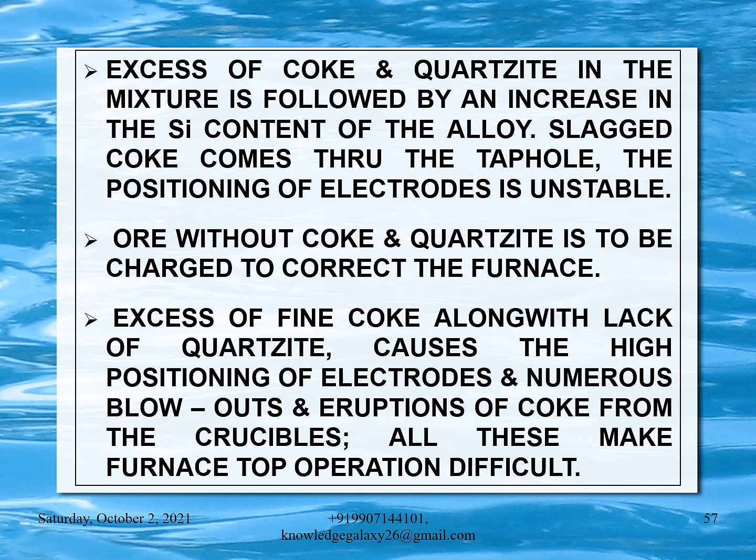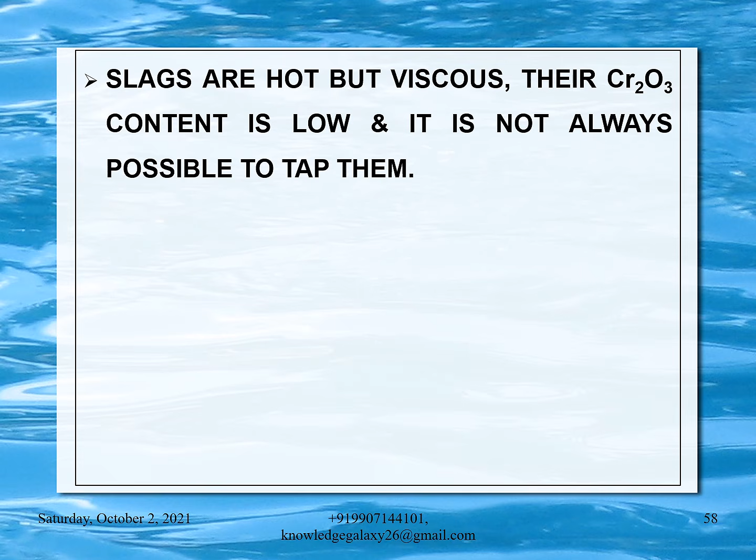Excess of fine coke along with lack of quartzite causes the high positioning of electrodes and numerous blowouts and eruptions of coke from the crucibles. All these make furnace top operation very difficult. Slags are hot but viscous. Their Cr2O3 content is low and it is not always possible to tap them. After a check-up on mixture proportioning, the weight of the reducer per batch should be diminished.

Slag with elevated alumina content. In this case, slag becomes foamy and looks cold and acid. There is considerable slagging round the electrodes. Their positioning is unstable. The alloy is cold. To improve the furnace run, reverts shouldn't be charged following a check upon the proportioning and ore quality.

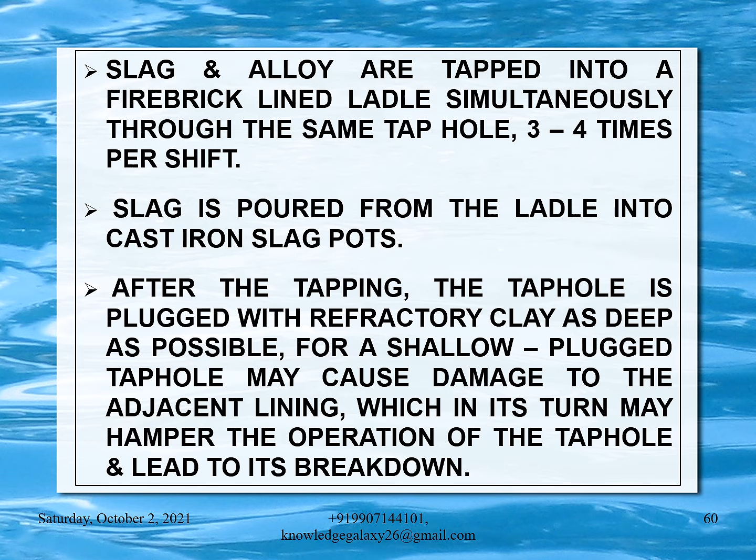Slag and alloy are tapped into a fire brick lined ladle simultaneously through the same tap hole 3 to 4 times per shift. Slag is poured from the ladle into cast iron slag pots. After the tapping, the tap hole is plugged with refractory clay as deep as possible, for a shallow plugged tap hole may cause damage to the adjacent lining which in its turn may hamper the operation of the tap hole and lead to its breakdown.

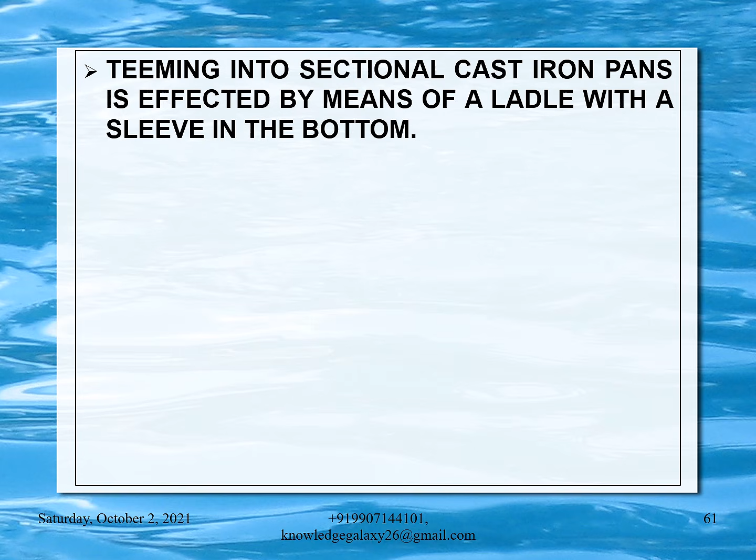Teeming into sectional cast iron pans is effected by means of a ladle with a sleeve in the bottom. During the teeming, a sample is taken with a spoon and analyzed for chromium, silicon, carbon, phosphorus and sulfur content. On the following day, cooled alloy ingots are smashed into lumps of not more than 15 kg, cleared of slag and stored. Foundry ferrochrome as a rule is granulated.

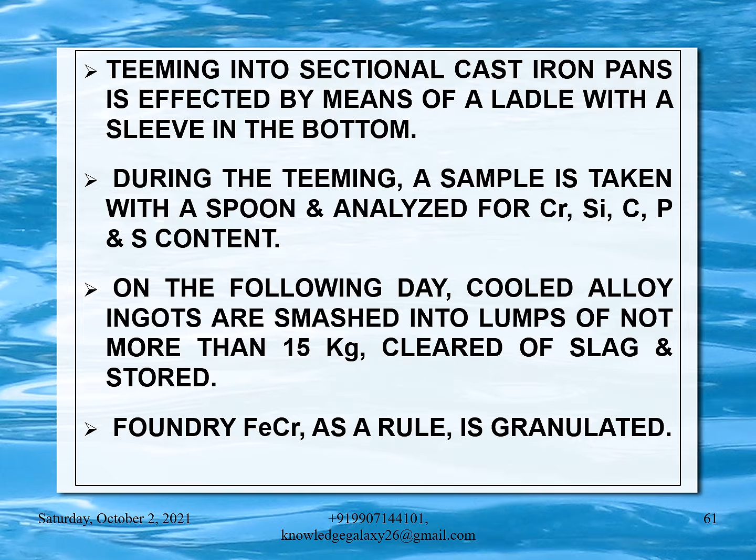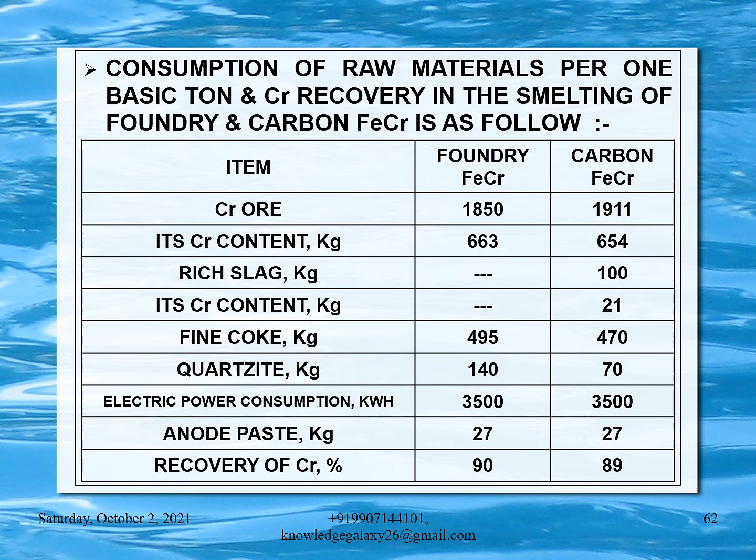Fine coke: 495 kg for foundry ferrochrome and 470 kg for carbon ferrochrome. Quartzite: 140 kg for foundry ferrochrome and 70 kg for carbon ferrochrome. Electric power consumption is 3500 kWh for foundry ferrochrome and 3500 kWh for carbon ferrochrome as well. Anode paste is 27 kg for both. Recovery of chromium is 90% for foundry ferrochrome and 89% for carbon ferrochrome.